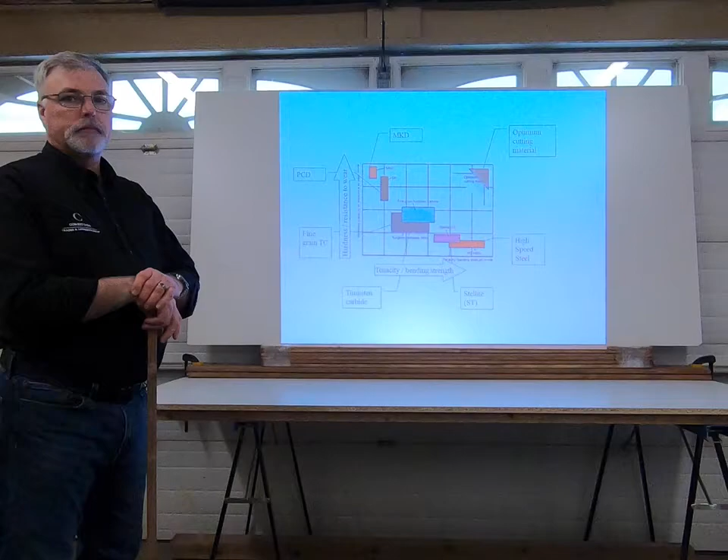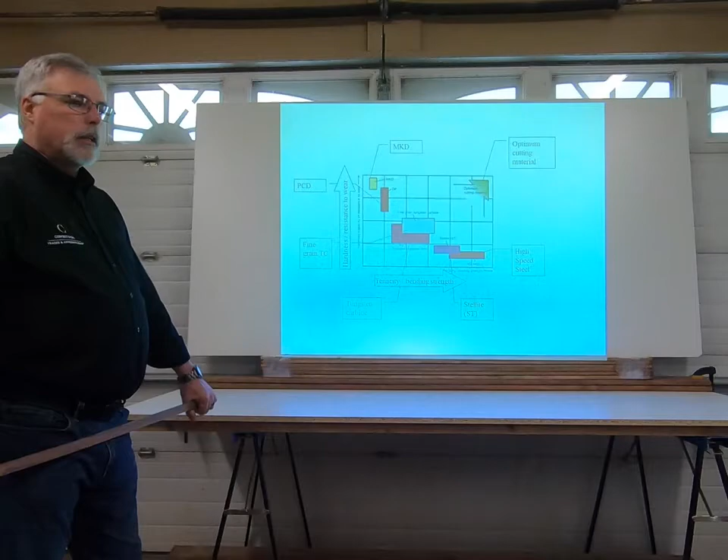Okay, we're going to carry on here. I have a chart or graph that's going to give you a better explanation of the cutting tools, products, the durability, and so on.

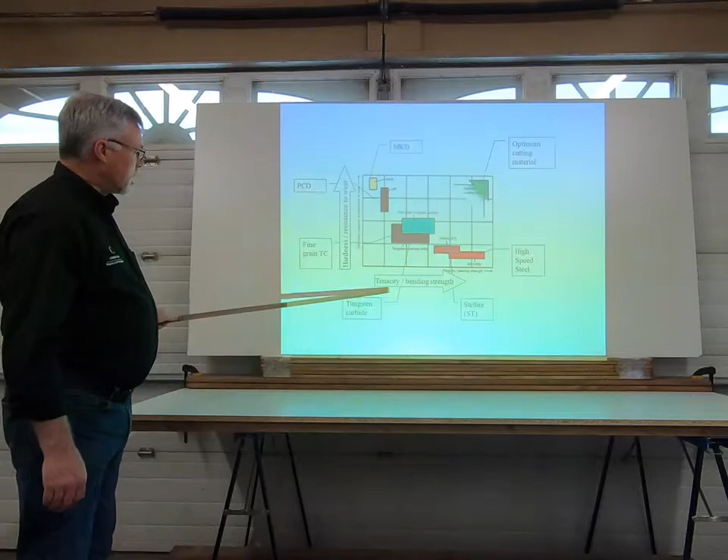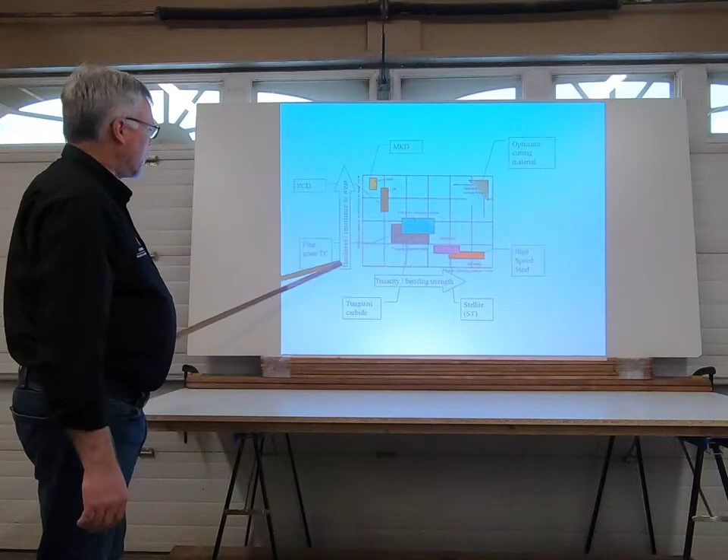We'll start off with high-speed steel, and this chart is set up so that we're looking at the tenacity and durability of that tool, how well it's going to hold an edge, and resistance to wear, and that's our comparison. As you can see, high-speed steel, as far as flexibility and so on, is actually a really good product.

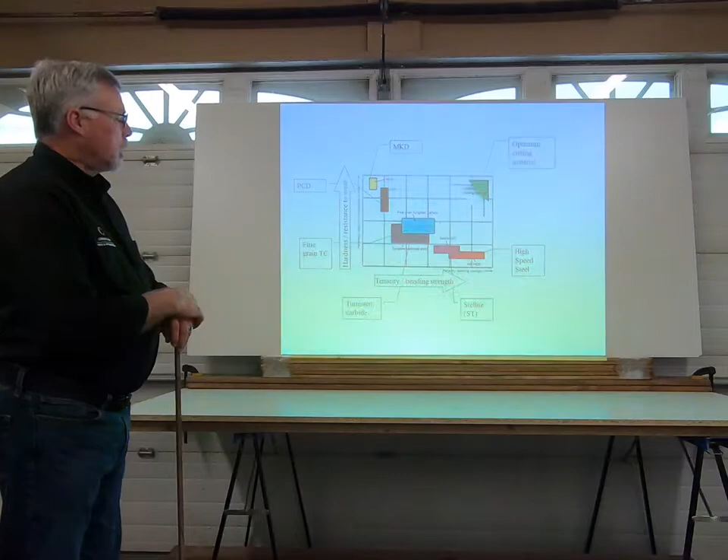The only difficulty with high-speed steel is that it does not hold an edge for very long. If you're running softwoods, you get a little more life out of it. It does not work well with hardwoods, and it doesn't work at all with man-made products.

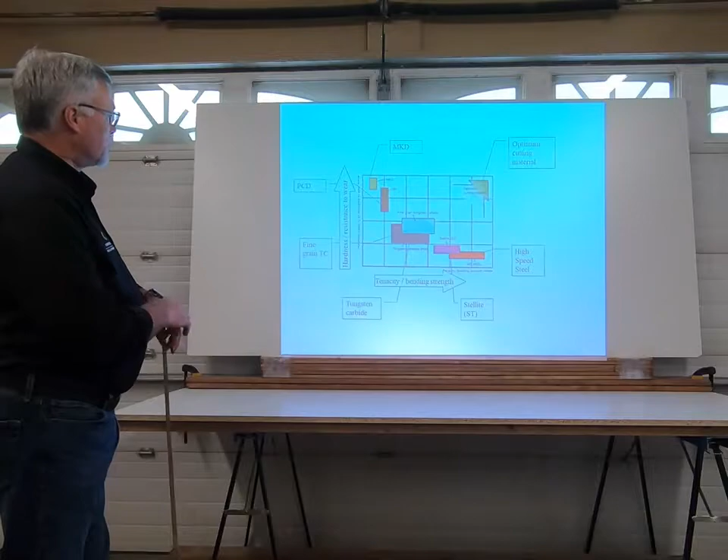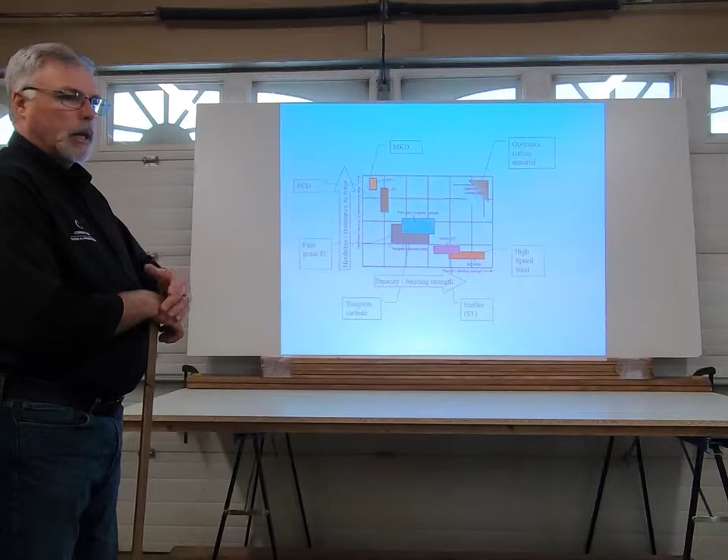That's why we have to go to carbide, and as you can see, carbide, that's the darker area here, the dark blue. Carbide tip is the preferred product for wood manufacturing, because it's fairly central as far as durability, strength, and flexibility. We use it on all of our table saw blades, router cutters, shaper cutters, and so on. As I talked earlier, there's different grades of carbide, so depending on how much you invest in the tool, and the prep of the tool is also a factor, whether the cutting angles and so on are done up correctly.

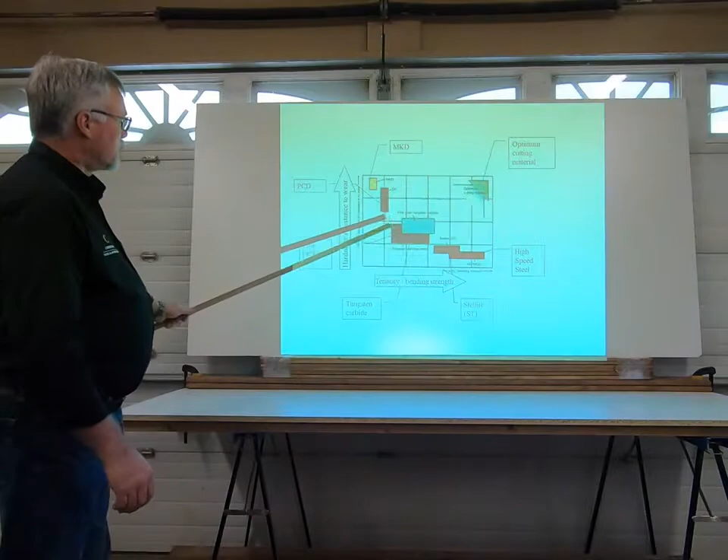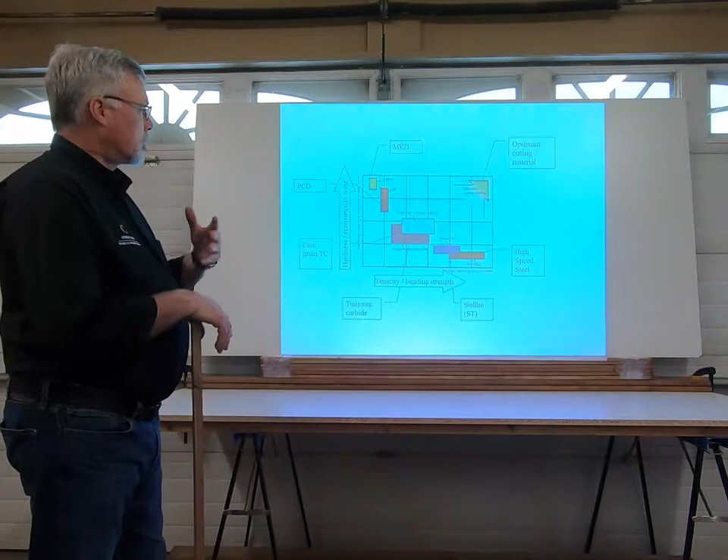The most durable product we have available today is the polycrystalline diamond and the monocrystalline diamond. These products are used exclusively on CNC machines, anywhere you have controlled feed, controlled cutter rotation, and controlled pressure. That is three components required to get the best performance out of diamond tip tooling.

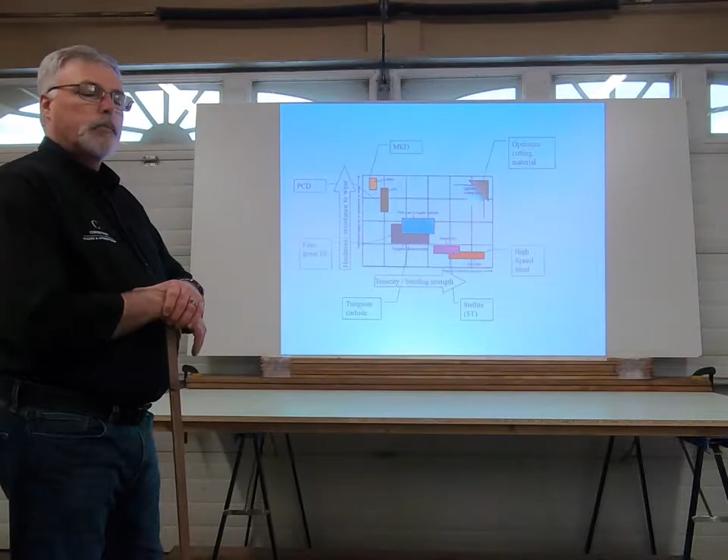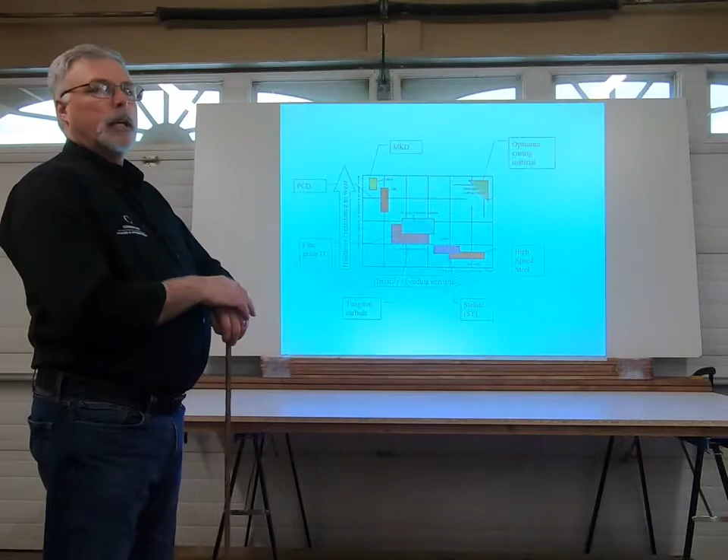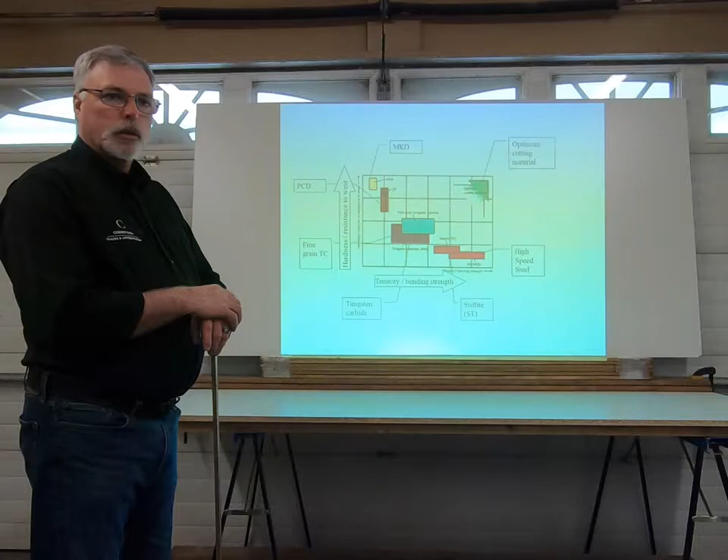An interesting thing about diamond tooling versus carbide tip: when you purchase a carbide tip tool and send it out for sharpening, it's actually ground on the face of the tool, and that reduces the diameter of the tool every time they grind it. With diamond tip, they actually remove the diamond off the tool, sharpen it, and reinstall it in the exact same position as to where you bought it. So they guarantee the diameter of that tool when you make that purchase, and that's one of the reasons it costs so much for that type of tooling.

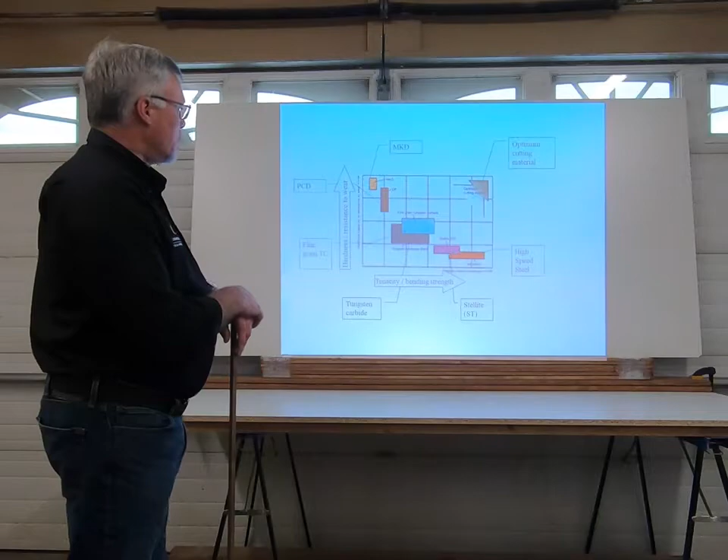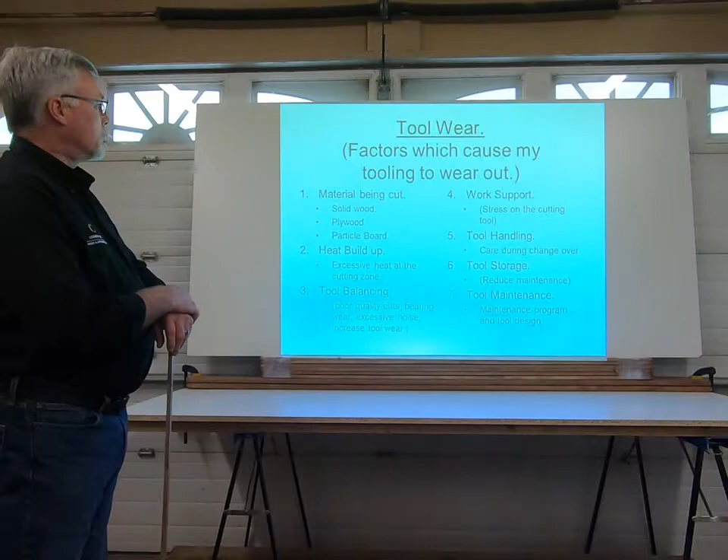We'll move forward to the next section there. In this one, I want to talk about tool wear. These are the factors which may cause tooling to wear out, and some of this is fairly straightforward.

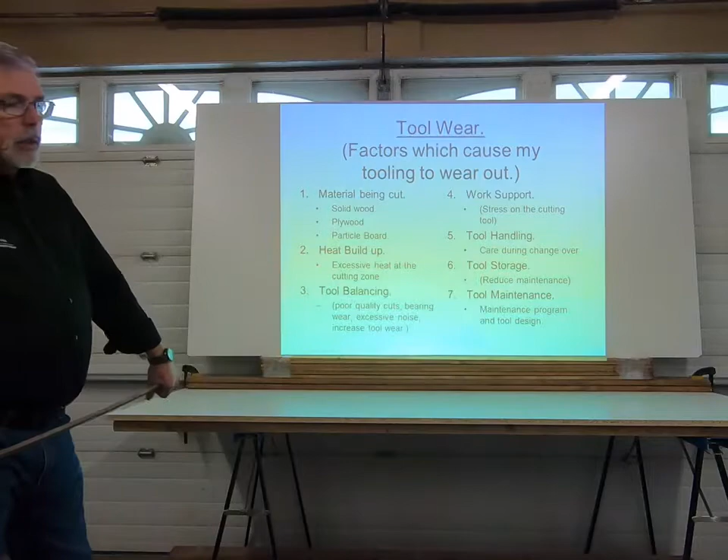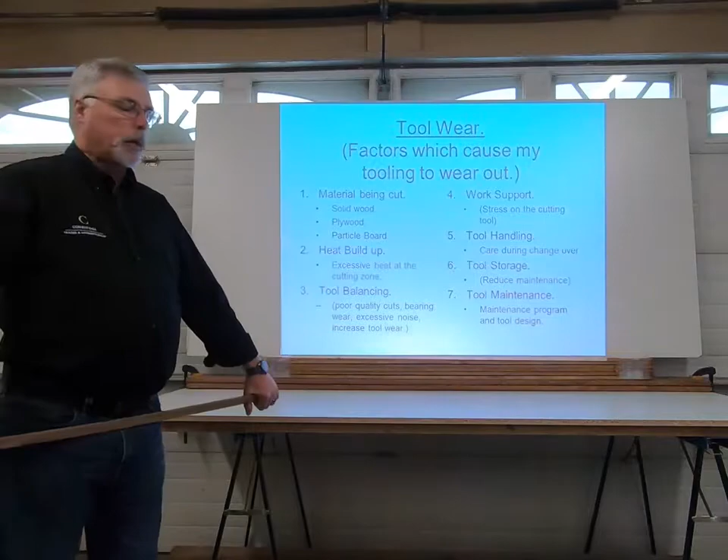We wanted to mention the material being cut, whether it's solid wood, plywood, or particle board, man-made products—that's going to have a significant impact on the life of that tool. Heat buildup, how well your cutting tool dissipates that heat, excessive heat in the cutting zone—that's going to be a factor in your clearance, your back angle clearance, and the cutting angle of that tool.

It's all going to have a factor on the heat buildup. Tool balancing, poor quality cuts, bearing wear, excessive noise, increased tool wear—we've talked about this with the molder and the shaper, the importance of having properly designed tools as far as balancing goes. Anything that's going to generate vibration is going to have a direct impact on that cutting tool.

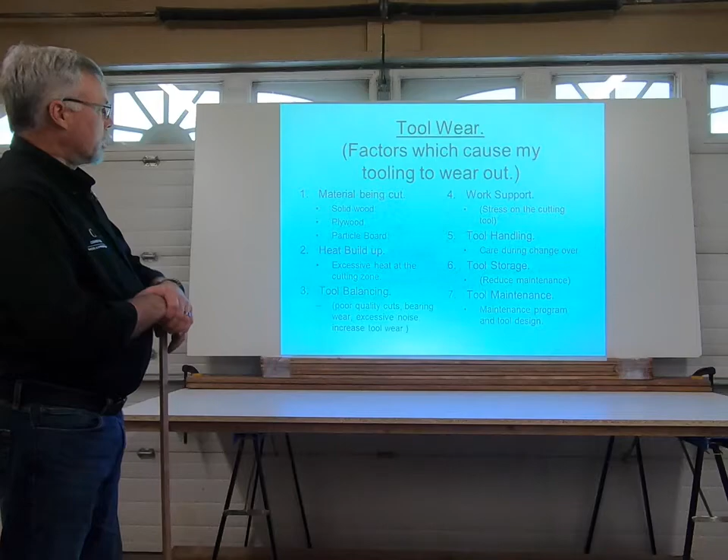Stress on the cutting tool is going to be a factor with work support. So if we have a controlled pressure device, such as a power feed unit, or a vacuum system like we have on the CNC router, we're going to get more life out of that tool.

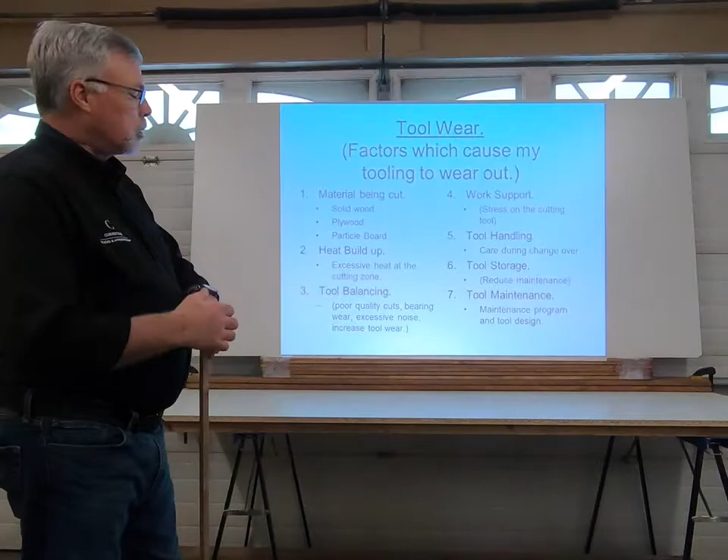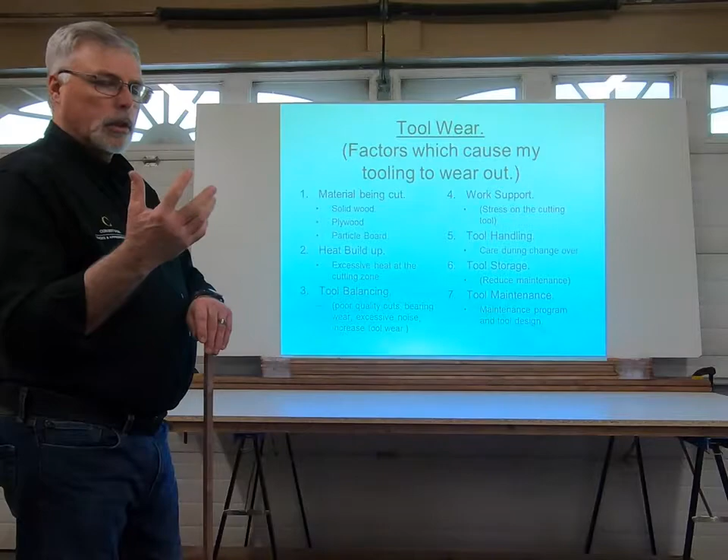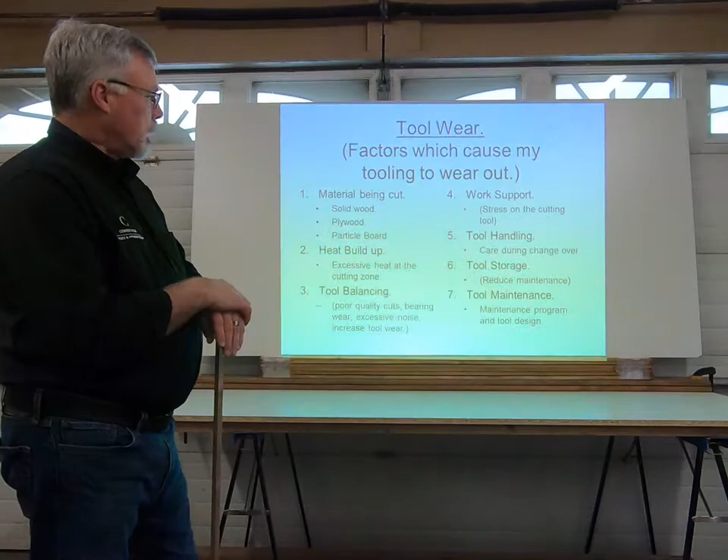A few things that a lot of people don't necessarily think about with this tooling is how you handle the tools, and I often talk about this when I'm doing demonstrations in classes. You should never set a tool down on a steel surface. You always have a piece of plywood or something there to set that tool down and reduce the risk of damage. And how you handle that tool during a tool changeover, whether you're bumping it on the frame of the machine, that all has a factor.

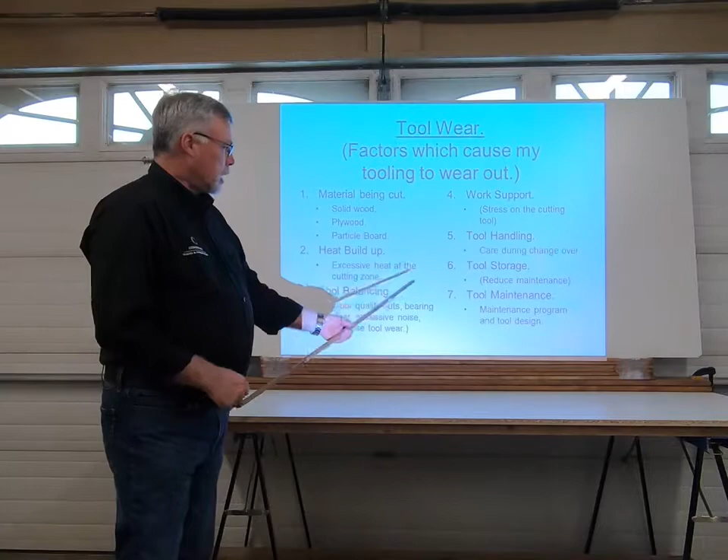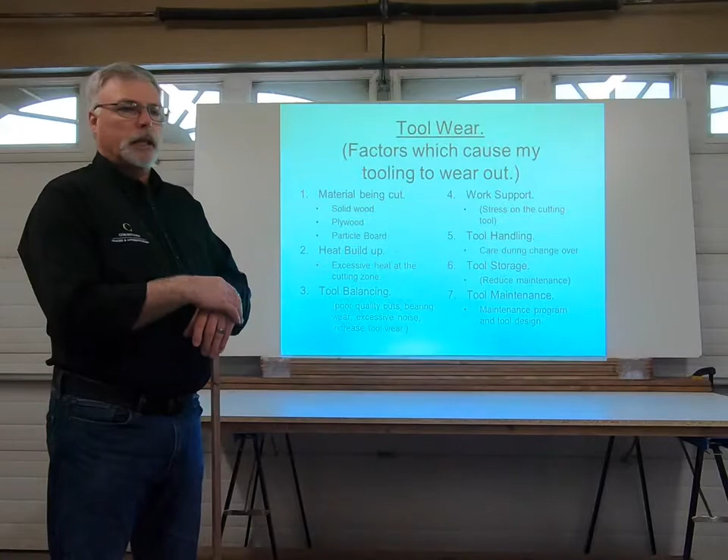Tool storage—in our tool room we have pegs on the wall that we're hanging tools on. How you look after your tools is going to have a big impact, whether you're just setting them on a shelf and piling tools on top of each other, all of that's going to have an impact.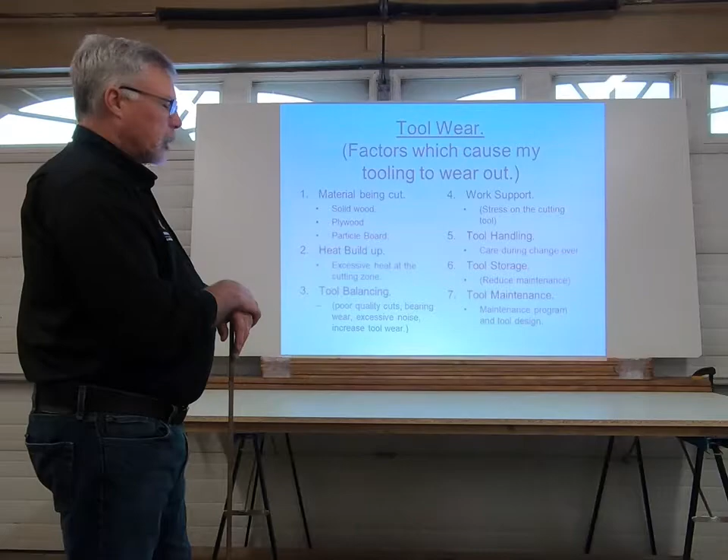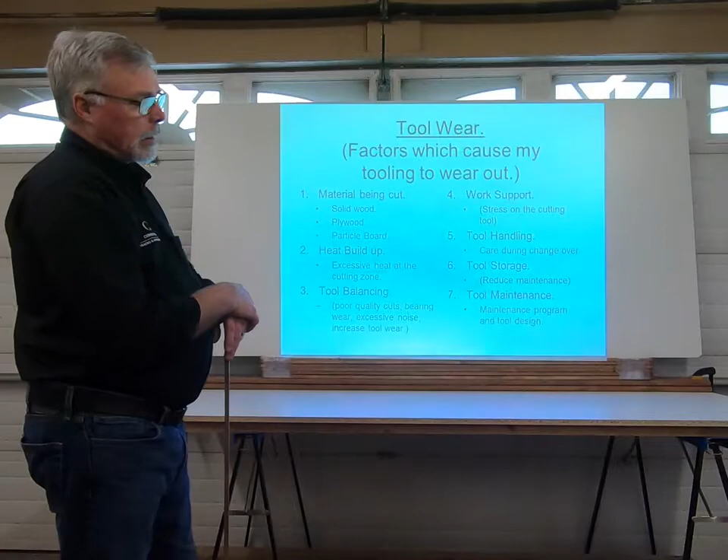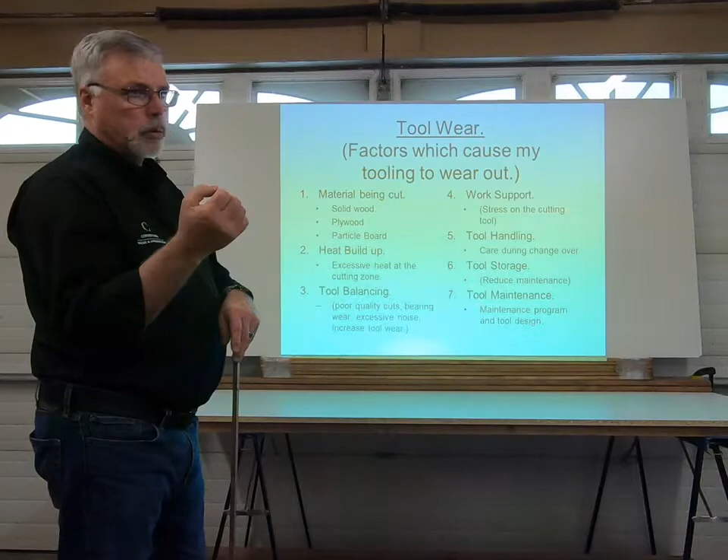And of course, a tool maintenance program—it's a great idea to have regular service on your tools. It will extend the life of your tools, and a lot of companies will have a maintenance program set up in place for tool design. That's something you set up with your tool supplier. More often than not, they are the ones who actually design the tool, so they are the best ones to maintain and care for it. So these are just some things that will extend the life of your cutting tools.